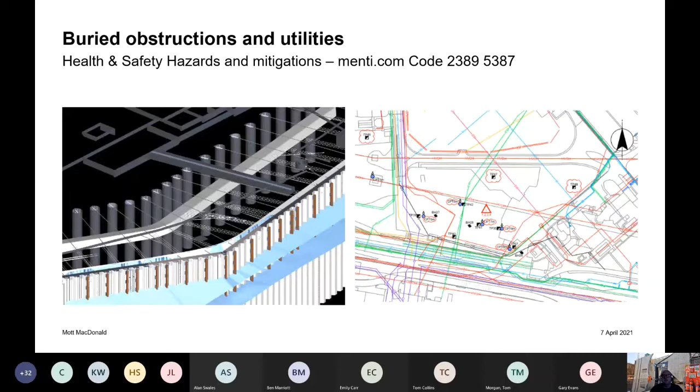The two pictures are from the case histories I'll be talking about. The one on the left is very congested infrastructure, new and old, in the ground. The one on the right is a site investigation with very congested utilities. Good luck with the Menti.

Just before the Second Gulf War, there was an awful lot of focus on intelligence, and Donald Rumsfeld, Secretary of Defense, was briefing the US government on the state of that intelligence, and he introduced this terminology around known knowns, things that we know. So in the context of tonight's talk, that might be a foundation in the ground from a building that's been demolished, for which we've got a really good as-built drawing, and we can see the outline of the footprint on the ground. So that would be a buried obstruction. We know it's there, so that's known knowns.

But we also have known unknowns. Very often, service drawings are schematic. So we might know that there's a gas pipeline following a road, but we don't know exactly where in the road it is. Those become our known unknowns.

And then there's also unknowable unknowns, things that you just can't know are buried in the ground until you encounter them. One good example of that was a site investigation we did at the Port of Boston, where a borehole struck an electricity cable six meters below ground level. It wasn't on any drawings, it wasn't known to the operations team, it wasn't in any sensible sort of location for anything you could have imagined, but there it was. That's really residual risk, but it's also potentially very high risk.

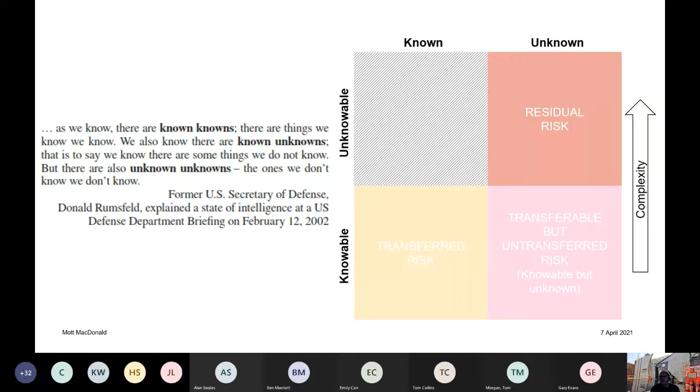The more effort you can put into moving things from that pink box to the yellow one by investigation, by really tenacious literature search and searching for records, the better for everybody. The earlier you can develop as complete a picture as possible of what might be buried in the ground, whether it's demolished buildings, services, or whatever, the better for the project. And that's a real passion of mine.

So a quick look at what the Eurocode says. As with most things in the Eurocode, it says everything and nothing. It doesn't refer to buried obstructions or services specifically, but in planning the design investigation, it says that we should provide enough information for adequate design of the temporary works. So if you've got to manage during construction with buried obstructions, buried foundations or whatever, then that fairly squarely falls into that category. We've got to provide the information required to plan the method of construction, and we've got to be able to identify any difficulties that may arise during construction. All three of those squarely point towards our duty of care to have properly investigated and defined, as far as reasonably possible, things that are buried in the ground that aren't readily identifiable, known unknowns and unknowable unknowns.

Design investigation shall identify in a reliable way the disposition and properties of all ground relevant to or affected by the proposed construction. Imagine working in a water treatment works where there's a buried tank in the ground, an old partially demolished tank, and part of your new structure is going to be on it, part of it isn't. You really need to know as early as possible where it is so that you can design around it.

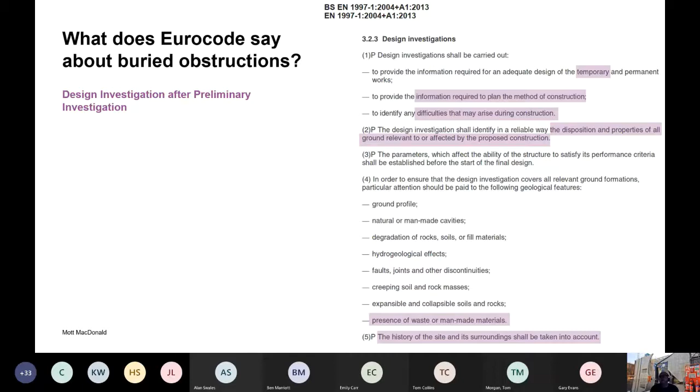So which comes first, the chicken or the egg? Do you design your layout and then manage the risks that are in the ground, or do you investigate the risks that are in the ground and then design your layout? There isn't a one-size-fits-all answer to that question. It's always complex, but hopefully you'll get some clarity on some approaches that we can take.

I think it's really important that for any site, as early as possible, you consider the complexity and the amount of experience or precedent that you've got for any aspect of the project. Specifically for what we're talking about, that's the complexity and precedent of the engineering that we're undertaking, the complexity and amount of precedent of working in a specific geology. And then for buried obstructions, the complexity and experience precedent of working in the Anthropocene, that is man-made problems.

So the 3 case histories: 2 from Boston, 1 on the left bank of the quay, and I'll show you that in a second, 1 on the control room, and 1 from a waste water treatment works. For the left bank, our geology is relatively benign, our natural geology. And for a sheet pile wall, it's glacial till, for which there's plenty of experience and precedent as well. So down here, our geology is relatively benign.

But we're interacting with a new quay wall with an existing quay wall. That means the engineering is very complex. And when I go through the site history, you'll see that the Anthropocene is also very complex in this red box. Really, we need to be doing as much as we can as early as possible in the project to allow the design concepts to fit around the dragons and monsters that may well be in the ground.

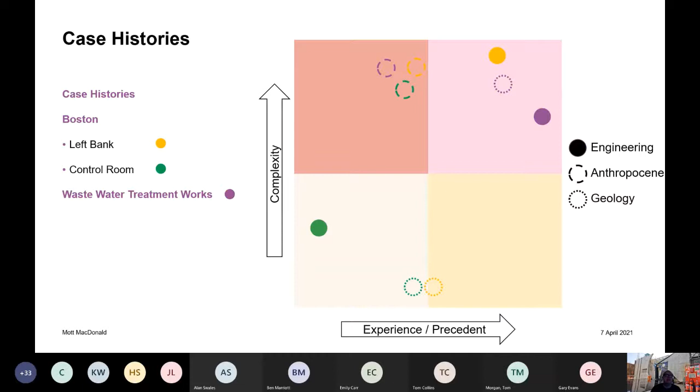So we've done our best, but there may still be problems in the ground. And this kind of classification I find really helpful to have discussions with peers, our design teams, contractors and early contractor involvement, and discussions with clients to make sure that everybody's in the right space for how nasty it might get when you start digging holes when there's stuff that we don't really want to be there.

So back to the Eurocode. The definitions of the 3 geotechnical categories are okay, helpful, but not exhaustive. They don't really deal with buried obstructions in any explicit way. And so those matrices that I've just presented, I think are really helpful.

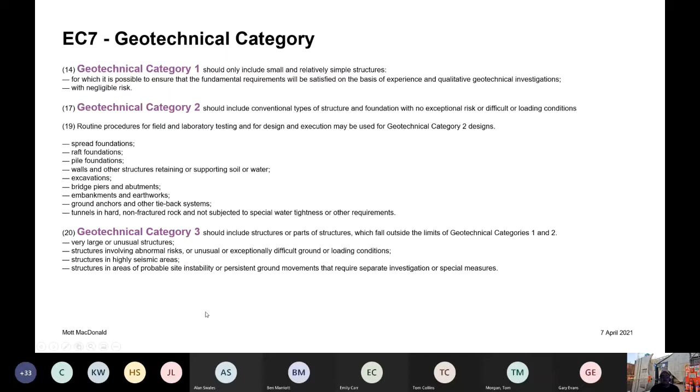You're never going to be in geotechnical category 1 if you've got congested utilities or buried obstructions. You will probably be in geotechnical category 2, but in certain circumstances you may involve abnormal risks, exceptionally or unusually difficult ground conditions, probable instability. So there are instances where I think buried obstructions could carry you into category 3, but the majority of the time you'll be in category 2.

Okay, so on to the case histories. Case histories 1 and 2, Boston. There's Boston in Lincolnshire on the Wash. A GA of the project.

It's a flood defence scheme. There's flood walls, new flood walls, sheet pile flood walls along the right bank of the river. A new barrier structure, enormous structure, with a 365-ton steel gate operated by 2 55-ton hydraulic rams. And then a new flood wall along the left bank, all of which is in the estate of the Port of Boston, which is well over 100 years old and has a checkered history in its development. Another set of gates and a new entrance into the port, and flood walls seal into an existing flood defence at Maud Foster Sluice.

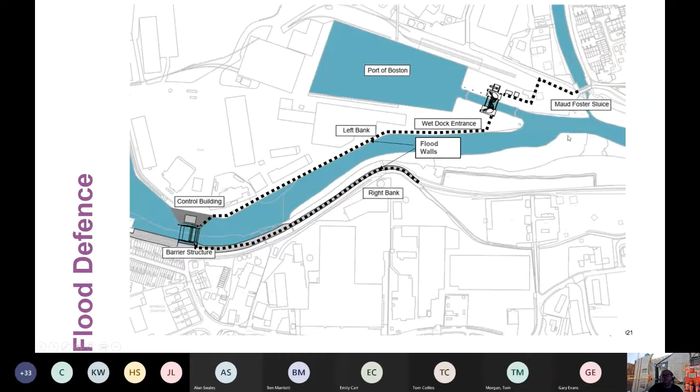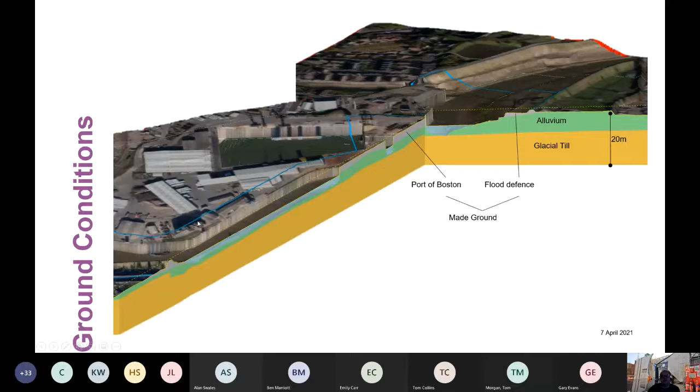Geology, well, I mentioned it's relatively benign in the natural. We've got glacial till and alluvium in yellow and green. The grey is made ground, which is typically 5 to 10 meters thick, very, very heterogeneous, locally contaminated, and as you'll see in a second, stacks of stuff from the historical development of the port.

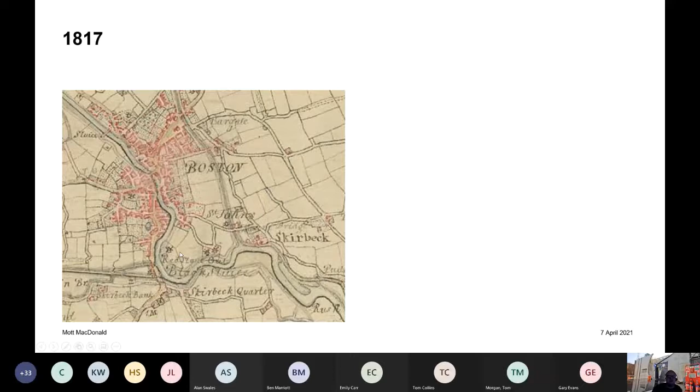By 1905, most of those buildings have been either developed further or demolished and replaced. There's a new ship slipway coming down, and those are the main developments by 1905.

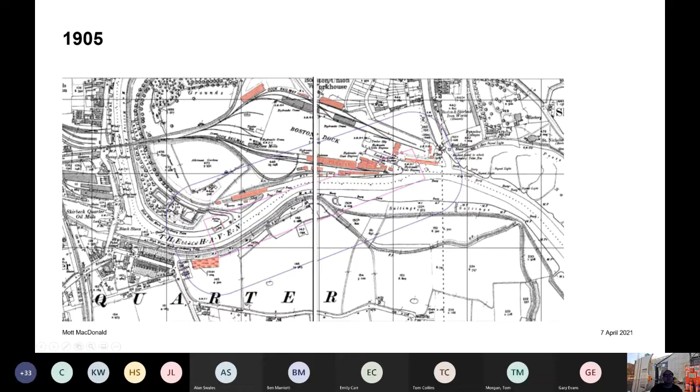Aerial photographs from 1930. Here you can see the slipway, and there's a slipway from the other side, and the dock and the railway. So our new wall is in this area here along the riverbank.

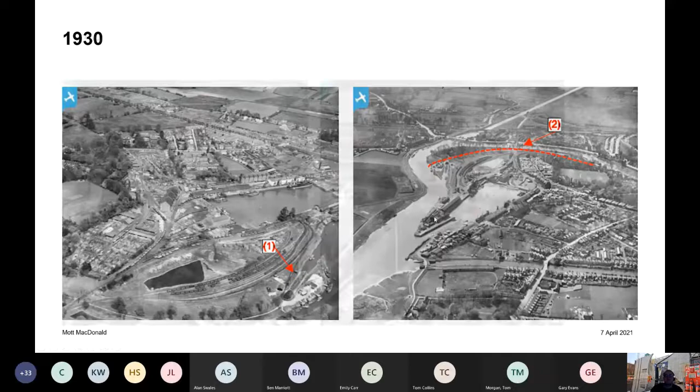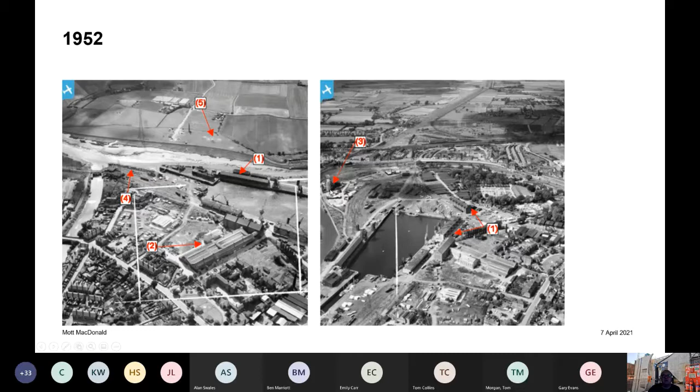By 1952, the left bank has been formalised with a concrete sheet pile quay wall, and this big sugar and grain silo has been constructed at that end.

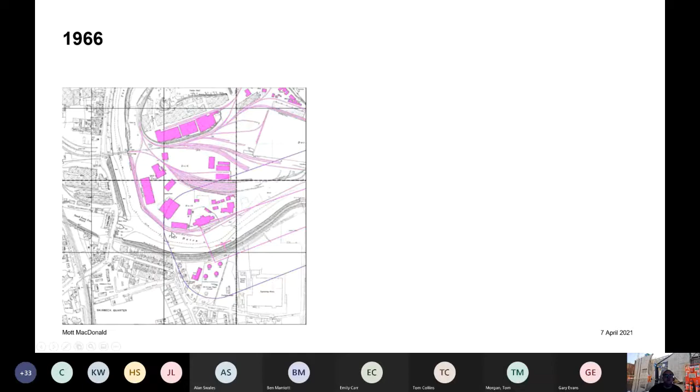Things getting really quite complicated. By 1966, some more new buildings and railway along the new quay wall, and crane rails in along the new quay wall as well.

From the engineering department at the Port of Boston, we've got this standard detail, which shows a concrete anchorage with anchor ties to a waling on the quay wall at the maximum bending moment, with bollard ties for the bollards that are intermittent along the top of the wall, but also passing reference to this alternative piled anchorage system, shown in dashed, with the anchor ties coming and tying onto this piled anchor trestle table. What you haven't got is a dimension, so you don't know where this anchor beam sits, and you don't know where this piled trestle table sits.

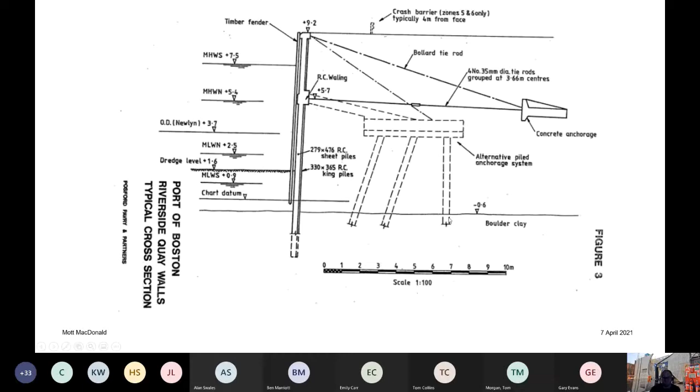So here's a potted composite history of all those historical maps, and we are building a new sheet pile wall in this area along here that will need an anchorage system somewhere back here.

Not long after the start of the design and construct, this black area here was found on a new drawing that was unearthed. That is the anchor beam there and there from this standard detail, and these blue patches here are the trestle table anchorage of the existing quay wall.

This was a real problem because the flood wall was proposed to be a sheet pile wall pretty much along this line, and obviously it's not possible to do a sheet pile wall through a big concrete anchor block, and so we had to come up with a different plan.

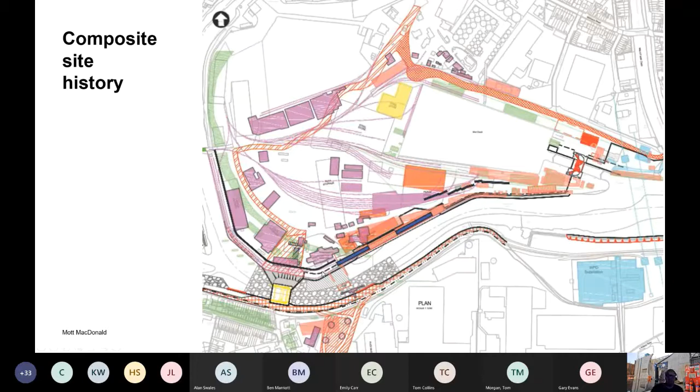So what I'm going to do now is dip into the BIM model of the job.

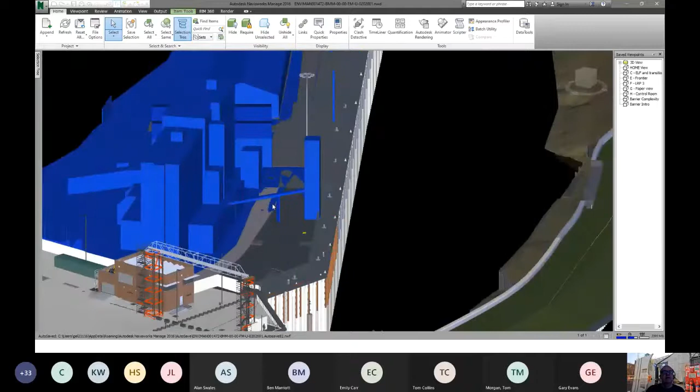Here's the river, right bank, left bank. Here's the barrier. This is the area that we're going to be looking at, just in here, so that you can see how some of this congestion manifests itself.

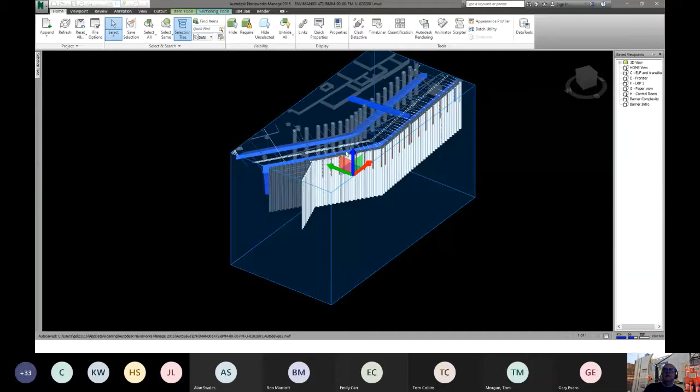If I now drop this down so that you can see into the ground, you can see there's the anchor beam for the existing quay wall, and here's the existing quay wall. And if I zoom in a bit, there you can see the anchor ties and the bollard ties as well.

We did a small trial excavation and unearthed this anchor beam in exactly the position the drawings suggested it would be. This is a tunnel, a culvert from the grain silo to a crossing that used to take grain to the other side of the river.

The original plan was a sheet pile wall in this area to use as the anchorage for the new quay wall, which is here at the front. The changes and discovery of the drawing that helped us lay this out meant we had to change our idea for the anchorage, and instead we went for discrete tube pile deadman anchors.

This had 4 or 5 specific advantages. First, we were able to put the tubes either side of this culvert, and to the rear side of the anchor beam. We had a degree of X and Y flexibility in the position of the piles, which you wouldn't have with a continuous sheet pile wall.

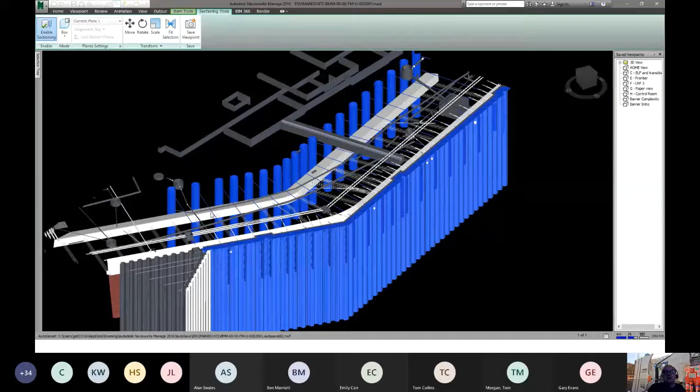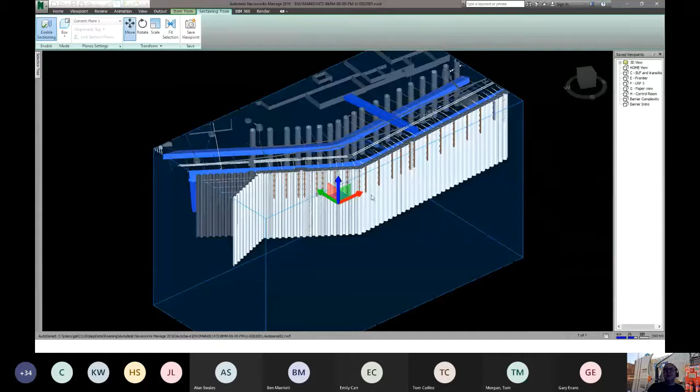We could also use the steel tube as temporary shoring to allow man entry to connect the anchors into the tube. We could connect at a high level so our anchors didn't clash with the anchor beam. Lots of advantages meant that the risk of clashing with these existing entities was able to be designed out.

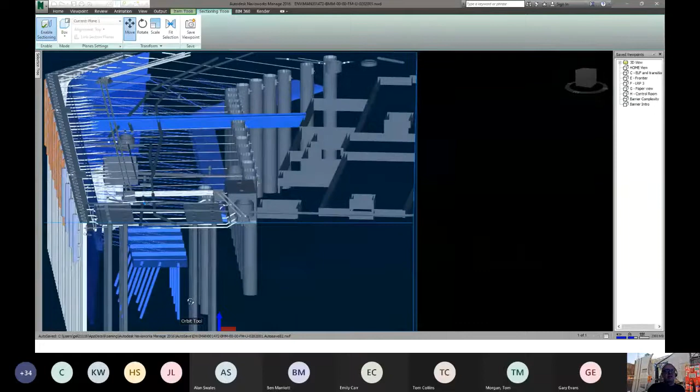If we go a little further along, here you can see the piled trestle table. Again with the tube piles, we were able to design around that in plan and have the flexibility that we needed with respect to that.

While I'm in the model, I'm going to skip to the next case history, which is for the control building, highlighted in blue there.

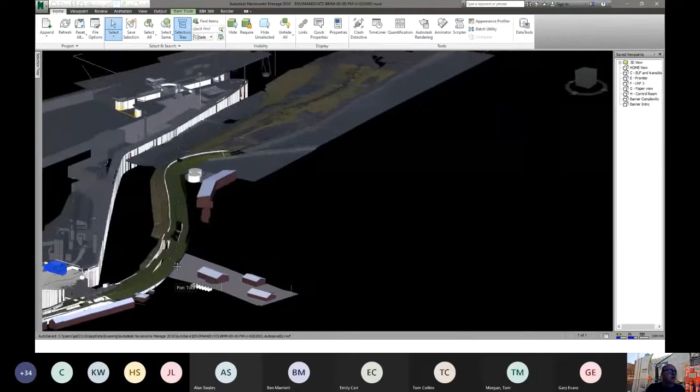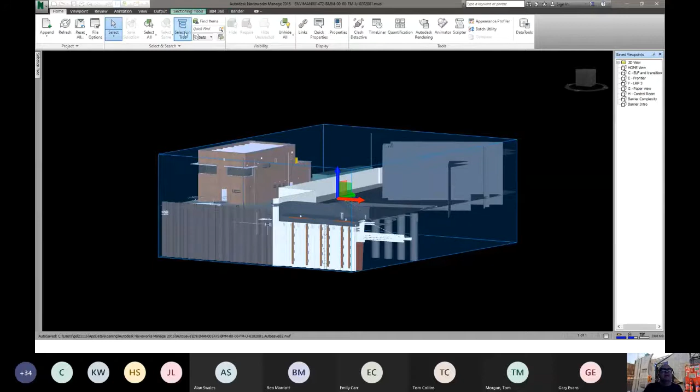We'll come in from the other side to start with. So there's the control room. The control room houses the critical infrastructure required for raising the barrier, the power supply, the hydraulic pumps. All the critical plant is inside there.

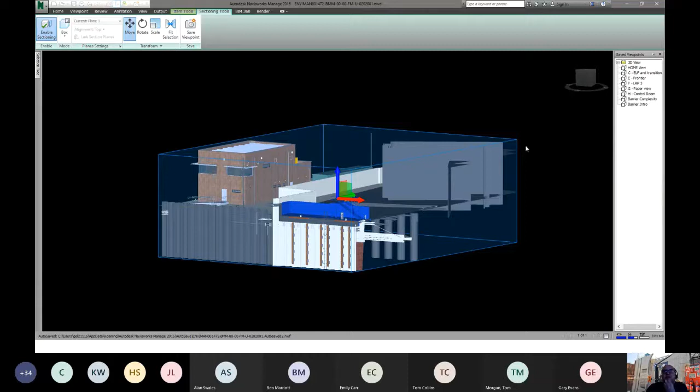Here's the flood wall. The control room is actually on the defended side of the flood wall, but there are individual pedestrian gates within it. There's still a possibility water may get to the wrong side and potentially flood the control room. For that reason, within the works information, we were required to make the control room waterproof.

That meant bulkhead doors at ground level needed to be waterproof, which were small and narrow, really constraining the M&E plant we could get inside and how easy it would be to service. We needed a standby generator, which would have needed to be on the other side of those bulkhead doors, a real problem, needing exhausting and refueling from above the flood defence, also a big problem.

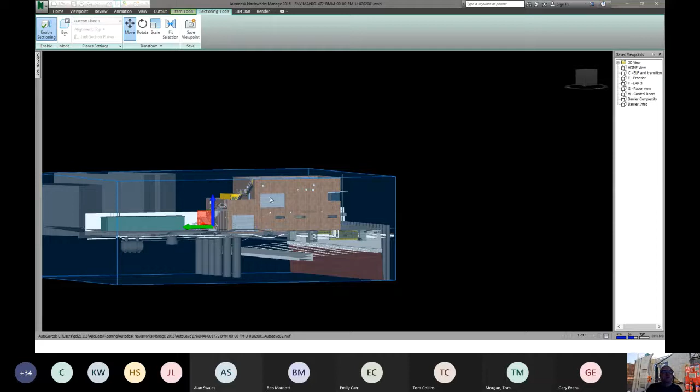So the solution was relatively straightforward: you move all the critical infrastructure. Also, in the flood condition the building would become buoyant, so you needed hold-down piles to stop it floating away. The solution was to put the critical infrastructure upstairs, and all those problems go away.

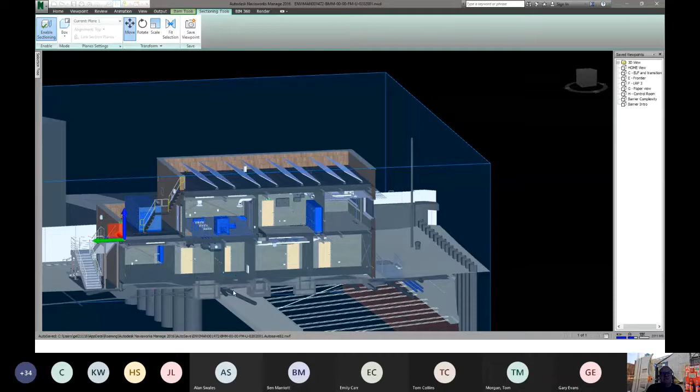These are the MCC kiosks for the electrical. Here's the hydraulic oil supply, and the hydraulic pumps are in here. Here's the generator, now easy to refuel, with an exhaust outside on a platform. All those design changes inside the building meant we were able to consider not using piles.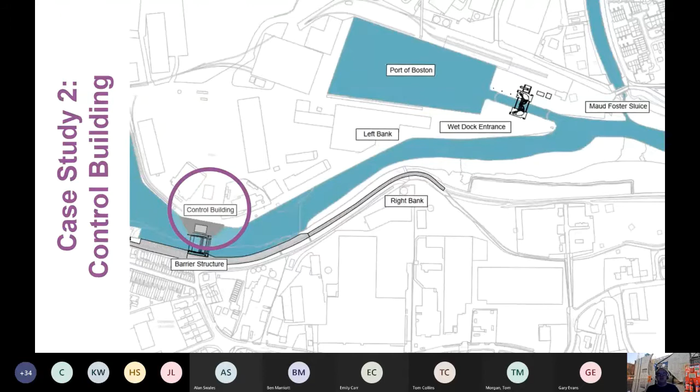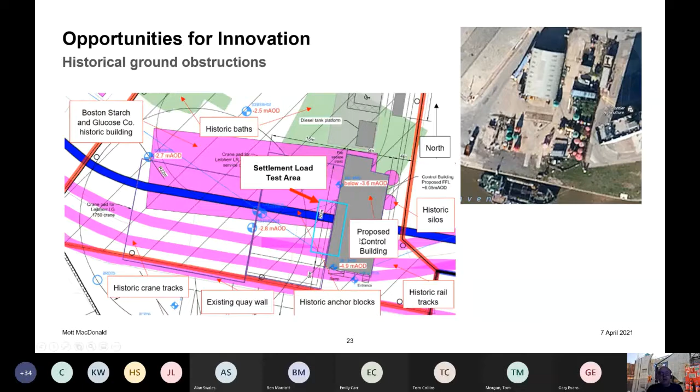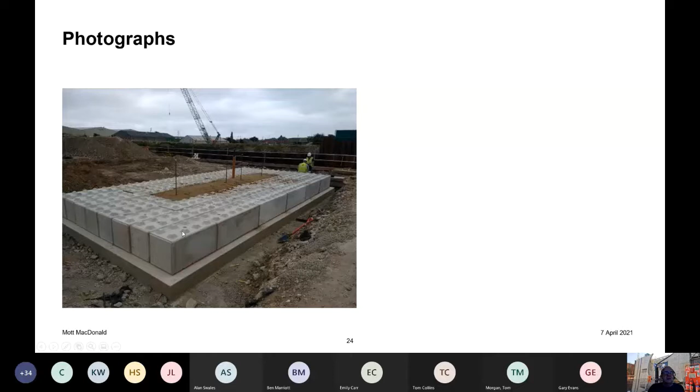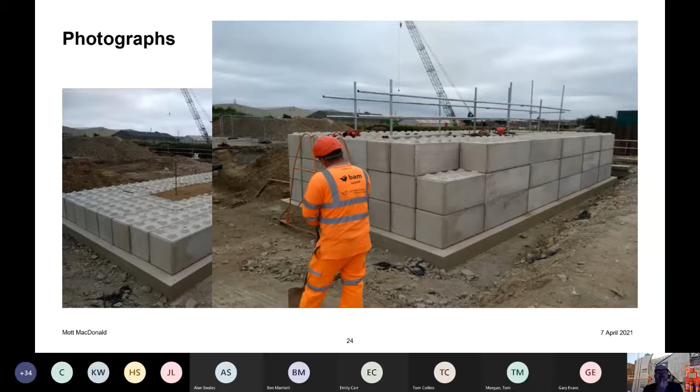So we took the opportunity to do a settlement load test. We cast a small raft foundation, built up Kentledge using Legato blocks and sand on 3 levels, installed a bunch of monitoring, and were able to demonstrate that we could use a raft foundation. Although there was a reasonable thickness of made ground, it was predominantly granular, and settlements would be immediate with no long-term risks of consolidation or creep.

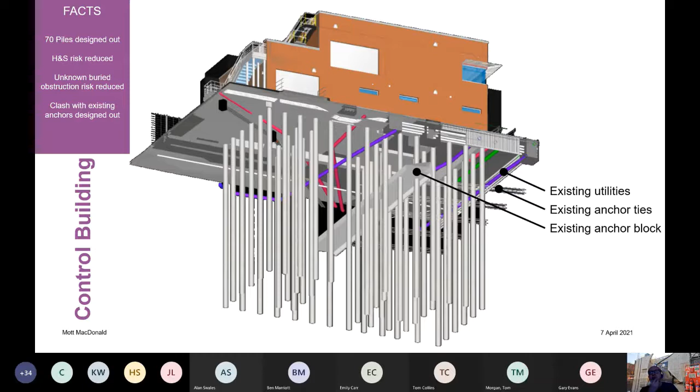All the clashes designed out and the unknown buried risk reduced significantly in terms of finance. There's obviously the capex saving from the piles and the piling, but also the risk of delay, critical delay. The control room, not surprisingly, is on the critical path for commissioning the barrier.

On to the third case study. This is a wastewater treatment works - it's just a ground investigation. Just a ground investigation, who knows? It's still quite easy to kill someone in a site investigation. We were doing boreholes. We'd done a services search and got services drawings.

We'd laid the boreholes out around those services to avoid them. We'd had consultation with the ops team for anything they knew from local knowledge. We'd done PAS 182 GPR clearance of the site. We'd done a surface CAT scan. We'd done a hand dug inspection pit, and we'd CAT scanned the bottom of the inspection pit. What could possibly go wrong?

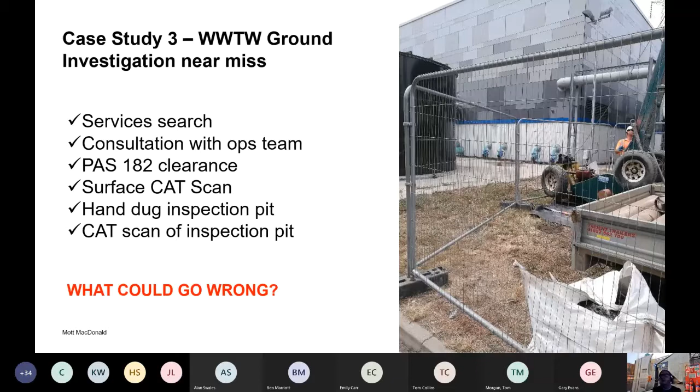The problem was that this was a change. This was borehole 1A - I don't know whether it was borehole 1A, but we'd had to terminate a previous borehole, and we'd changed positions and offset. There was perhaps elements of groupthink, that this was about the 10th A, B or C borehole we'd done where we'd have to offset. We went through a degree of process blindness.

We'd gone through all the checks I've just said and not detected anything. The problem was that there was a polyethylene pipe carrying raw sewage sludge from this wheel over here to these pipes over there. And the thing that saved us was the experience, expertise and competence of the driller, who immediately recognised the behaviour of his drilling rods was wrong, stopped work immediately, and that's why we had a near miss and not a very messy and smelly accident.

Root cause? Well, we didn't find it because it was a change. We moved on through the process without actually just pausing for that amount of time to take a step back and actually look and see these pipes - the same colour - crossing the area where we were. The big problem was that the pipes were polyethylene, so none of the techniques we'd used detected them.

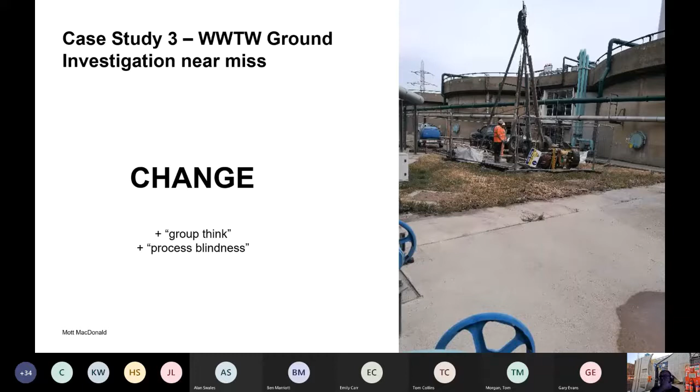So here's a challenge: if we struggled to sink a borehole there, how's anyone going to build a piled foundation there? If you think those models I just showed you at Boston were complex in the ground, it's going to be absolutely horrific for anyone that's got to build a new building in that area, and how you fairly and squarely share the risk between the client and the supplier for that risk is really challenging.

And that leads me to this statement that came from a very wise, but I will remain anonymous, friend of mine. He says the tender is an exercise in selecting the most ignorant, most desperate, or most commercially savvy supplier. And none of those things are good for a client, and none of those things - certainly ignorant or desperate - are good for health and safety.

So really, a baseline of what is or might be - known unknowns, or good imagination of unknowable unknowns, what might be in the ground - built upon as complete a picture as possible, as early as possible in the project, is the best way to design out hazards. Designing them out is the best way to reduce risk. You do that early and you apportion risk equitably so that everybody is working in the right environment, atmosphere and space to manage the ground risk appropriately.

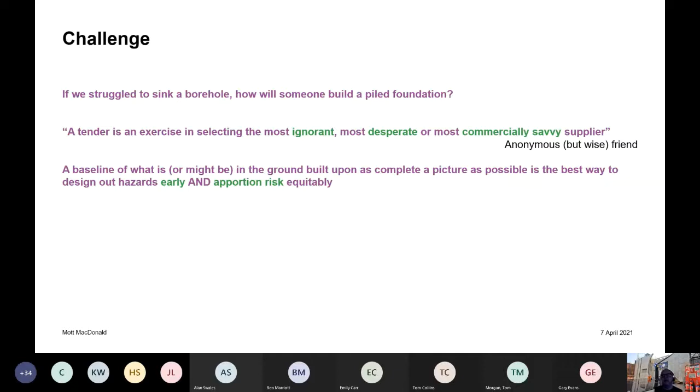So, mitigations and avoidance. I've given you some case histories now to hopefully help you understand the importance of concept design - not saying 'oh, it's just concept design.' If it's concept design, that's when you've got the most opportunity to design out, through avoidance, ground risk and utility risk.

Of course, you need procedures, risk assessments and method statements, toolbox talks. Brief back is really helpful - so when you give a toolbox talk, you ask the operatives to brief back to you what you've said. A permit to dig system that's signed off before anyone digs in the ground. And if things change, then you stop and replan.

Competence is important. You need experienced people with expertise and accreditations, CPCS cards and the like. But behaviours is probably the most important part of competence.

It's no good having poor quality RAMs and half-hearted toolbox talks and permits to dig signed off as part of a grudging approach to paperwork. Behaviours come from the top on site, but particularly from professionals on site, who really have to set the bar high in the behaviours we display so that others will follow.

That means really high quality RAMs. It means enthusiastic and committed toolbox talks. And it means really reinforcing this stop and replan rather than plough on because we've got to meet a deadline.

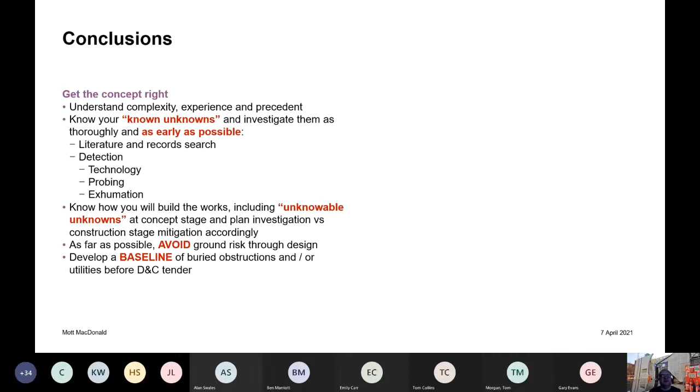Or you can say, well, we'll mitigate it at the construction stage, but understand what that means in terms of risk for buildability and design. Avoid this risk as far as you can through design, and if you can't, develop a baseline so that the risk can be shared equitably when you get into design and construct tender.

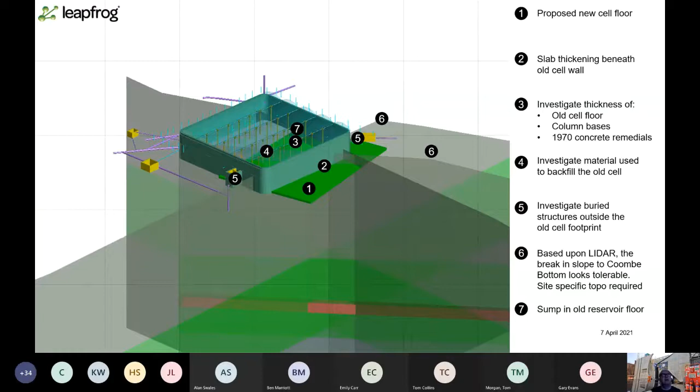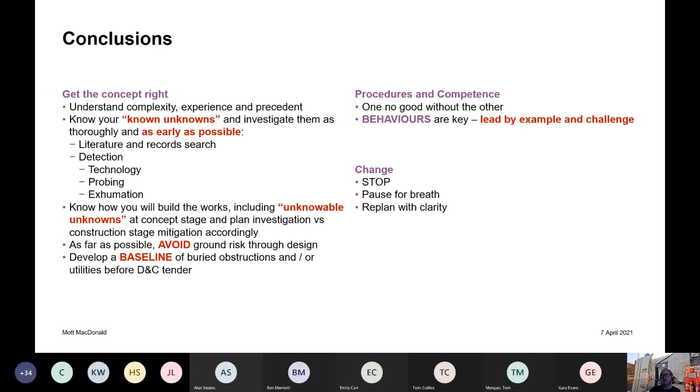And when you get change, stop, pause for breath. Don't plough on. Replan, but replan with clarity. Make sure you take a step back, zoom out, and reassess what might be there, not just what is thrown up through your process. So that's around about it.